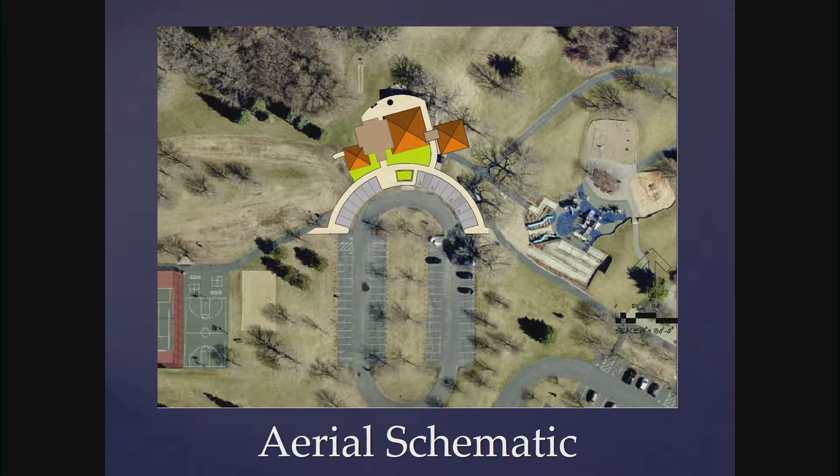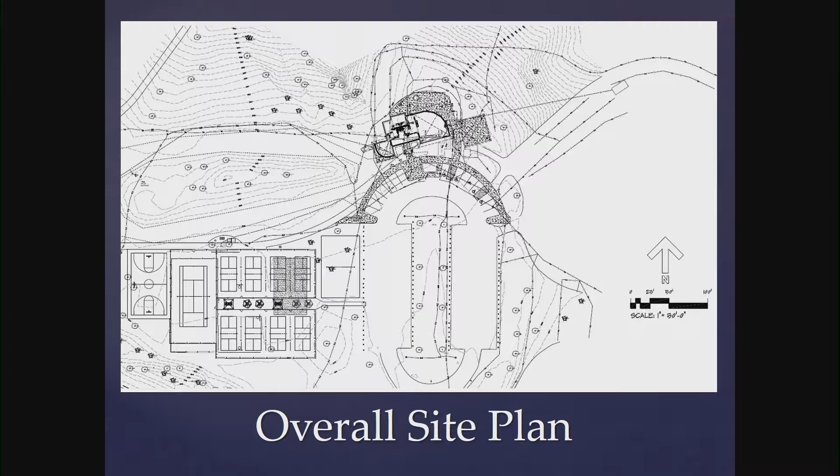This is kind of an overhead view. The aerial was done before the courts were in place, but you'll also see that if we superimpose it on this look, you're going to see where it is in relation to the courts and the sand volleyball court. Pretty tight site too. We've got some really high quality, significant oak trees that we are working around. There's no risk of having to take any of those trees down. We're able to fit that in terms of the layout of the building. It gets a little more linear than it was before, so you'll see the very left side of the building is more of that warming house for skating in the wintertime, support for summer playgrounds.

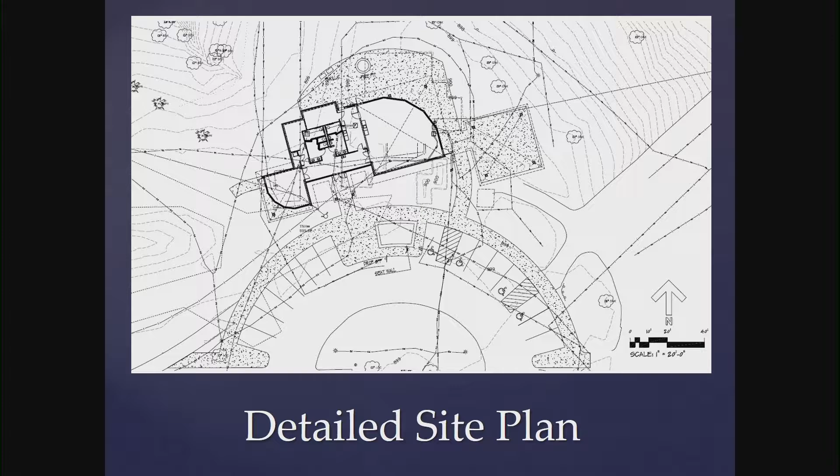The far right side ends up being more of the meeting room and also the warming area for the sledding hill. I do think that what we have designed in terms of a meeting room look and feel to it fits the graduation parties and the 50th wedding anniversaries taking place there now, with even more demand for that and an even better quality environment and experience.

So this shows it a little more in a summertime configuration, where you get an idea of how many tables, chairs, and benches can be put in place.

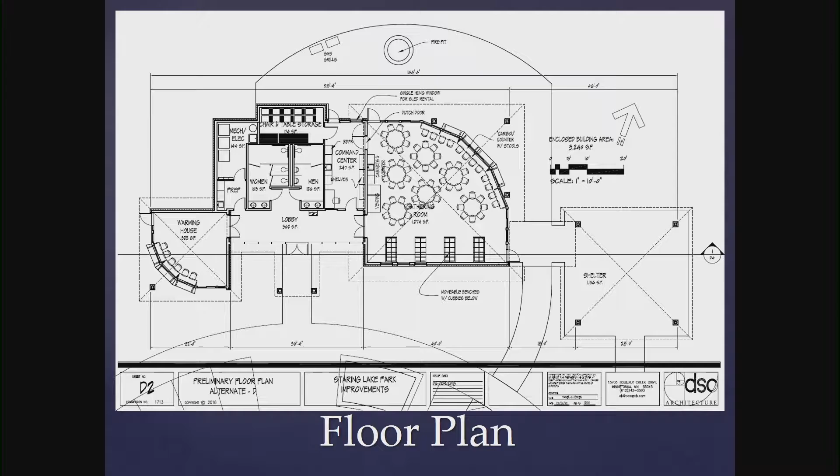The restrooms, similar to Purgatory, we would look to have those open most of the time for public use. You can also think of it as a good event space for a large pickleball tournament, as a good support facility. We've been seeing more 5K runs here and at Purgatory, so this is another place to host events like that.

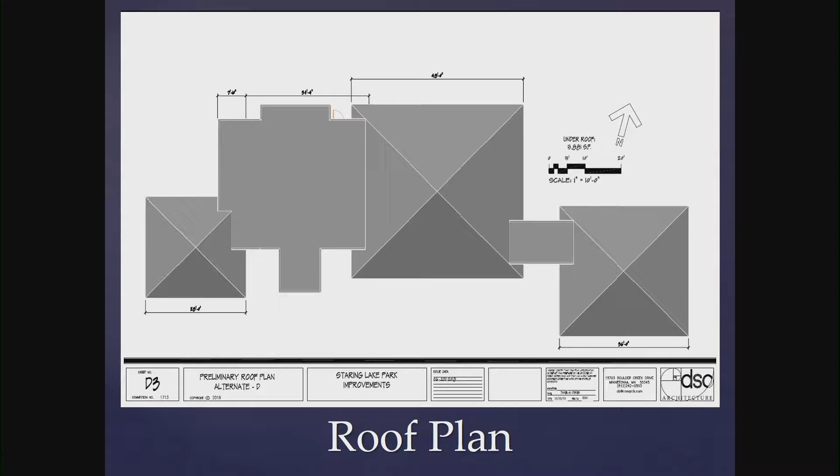This breaks down a little by square footage and what some of the features and amenities are. Again, because it's so open to the public and has such high visibility, with a great view and multiple great views, we're having a lot of windows and glass to look out and see the lake. You'll see a couple of renderings as I move forward showing how we can take advantage of that really nice view. Here's kind of a quick roof line layout from above.

Looking at it from the south, the far right is really a picnic shelter, and as we move forward in bidding, we'd likely have that as an alternate.

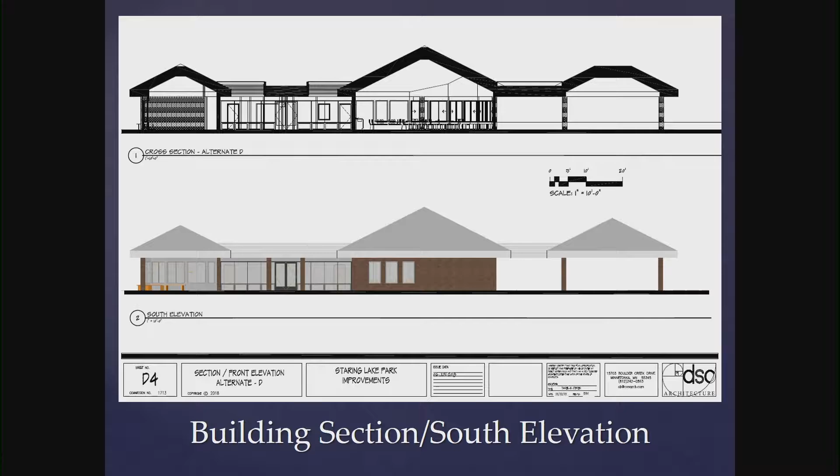The roof line has some overhangs. We're thinking about how people could go there and maybe push a button, like at a bus stop, to get some infrared heating. So if we don't have staff there, you as a parent could still get warmed up a little bit underneath the overhang, with some protection. It makes it a little more of an available facility even if we're not in a position to be staffing it.

Here are a couple other views. We haven't fully fleshed out what the materials will be, but there's some brick, block, and glass intermixed in the design. This is what it would look like from the south looking to the north.

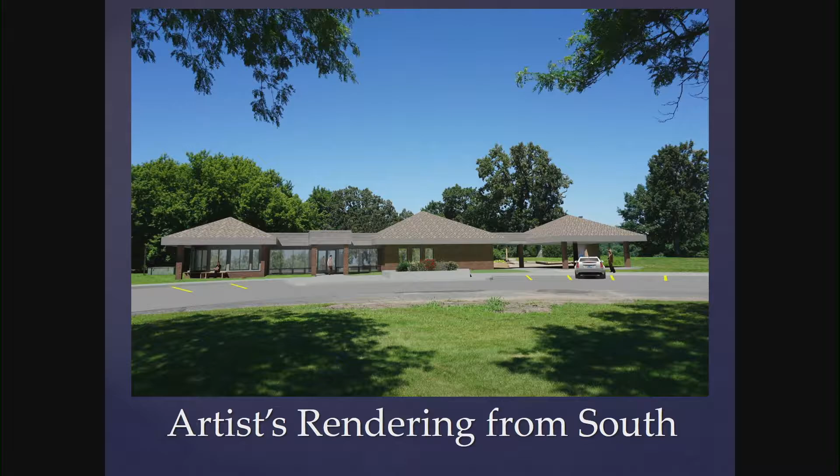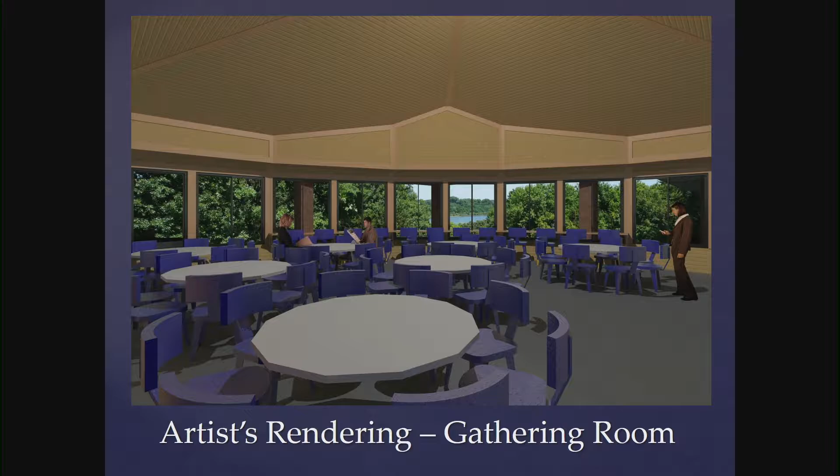If you remember at the aquatic center, we have a counter in a more controlled environment looking out into the pool, for parents who may not want to be in the pool environment. Same thing here — we're looking at a counter towards the window, so in the wintertime you could still see out at the sledding hill. In summertime, maybe there are crock pots on top of it if you're having a family reunion.

So the potential timeline we're looking at — we showed this presentation to the Parks Commission about a week ago and got some feedback from them. Following our presentation here tonight, if you elect to move forward, Mr. O'Brien would start working on the plans and specifications, which would take us to about January and February to bid out the project. We would come back with the results of the bid. If it were to move forward, construction would begin in April and we'd likely occupy by early November.

So with that, any questions?

I've got a question for Council: is the large room for 80 people big enough?

We have different rooms and facilities throughout the system. Even at the community center there are multiple levels of rooms. When we think about the overall site and what can fit there, this pushes it to the side — that's about the largest size we could get on the site without disrupting some of the oak trees or the drainage. I think when we look at why people want to rent a building at Homeward Hills, the barn, this fits into our system pretty well. If you're going to get higher, you're probably thinking about the Cambria room or other larger amenities we have, like the heritage rooms. Though this one has a view that none of the others have.

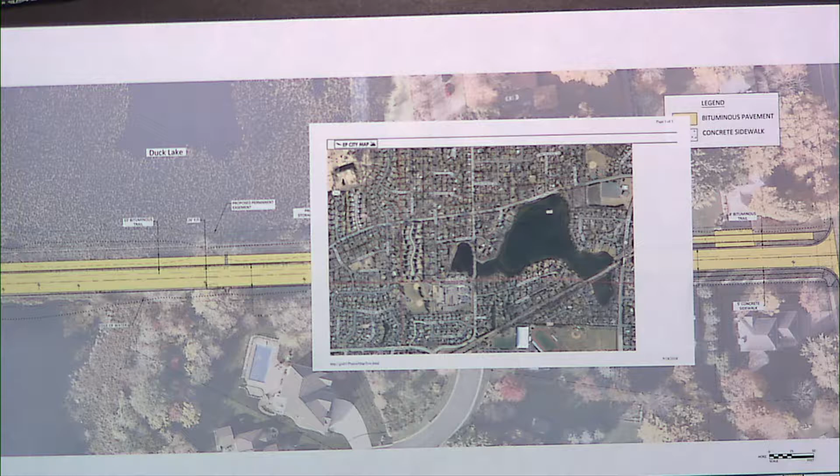As Rick mentioned, tonight we're going to be presenting the layout and asking for a resolution to approve the appraised values of the easements that we need for this layout.

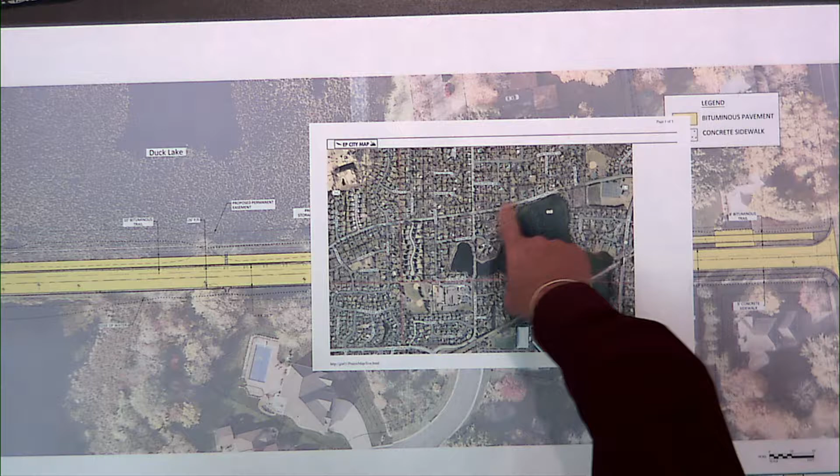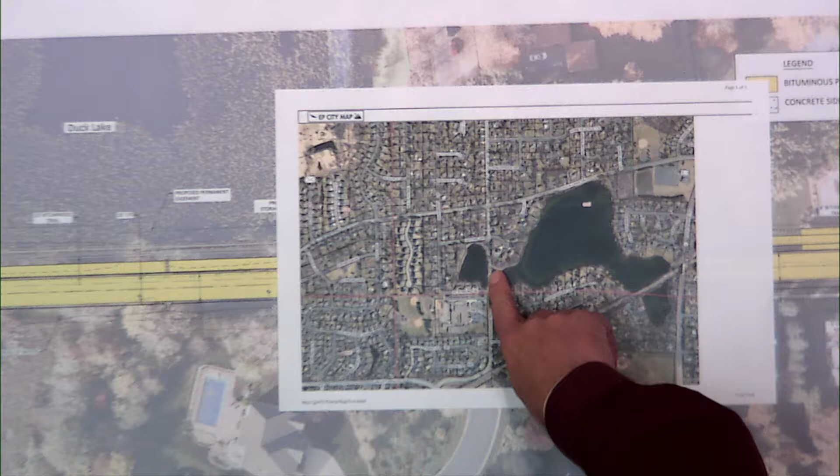So to start, the project limits are: here's Duck Lake Trail, Duck Lake Road, the high school down here, and Duck Lake Road divides the two water bodies. The project goes from Duck Lake Trail down to Mallard Court, this section right here.

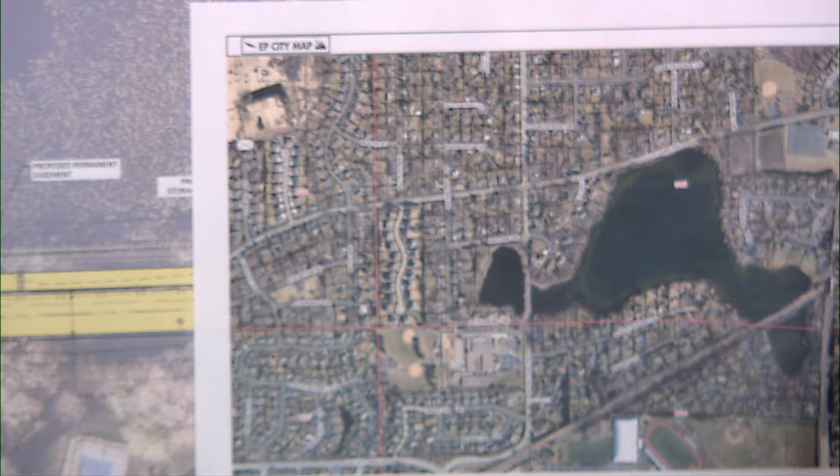I'll start on the layout from the north end. It's a fairly typical city street. The existing road in this northern piece is a little narrower. We're going to continue that same dimension, 26 feet face to face. We're proposing a trail on the west side and a sidewalk on the east side. The sidewalk on the east side would go down to Padons Drive.

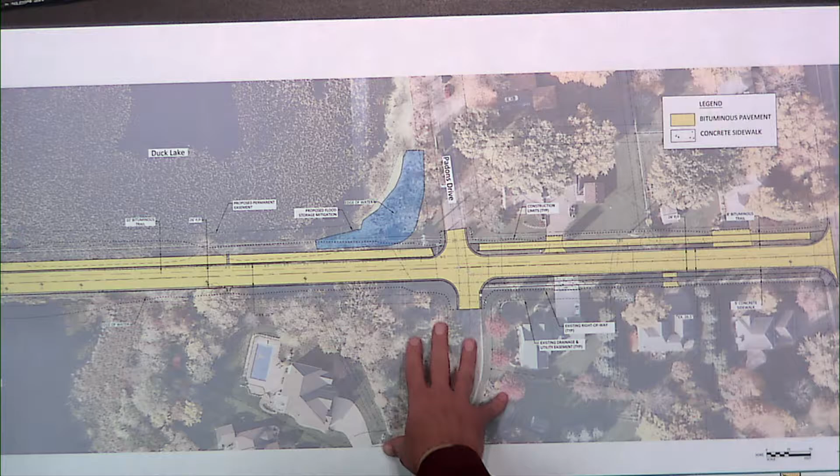And I'll talk about the gap here in a minute. The trail on the west side continues all the way down toward the school, past Padons Drive. Here's the lake area. I don't know how well you can see the construction limits, but I have another graphic later to show you that.

What we've done is we've looked through several alternatives through this section. Obviously, it's a very restricted area with water on both sides. We've looked at trying to continue the sidewalk and trail on both sides. Environmentally, it gets difficult. We had some internal discussions about how to lay the pedestrian and bicycle corridors out through here.

There was consensus that because we wanted some continuity on the west side to access the elementary school. And I failed to bring up the fact that we did have some neighborhood meetings last year in June to present the corridor and ask the neighbors what type of issues or problems they saw in this area. One of the things they mentioned was improving the pedestrian and bike facilities.

As you know, right now this section of road is very narrow. There's no walking without walking on the road. The road is sloughed off, there's really no shoulders. They asked for improvements because they were concerned about the safety of kids, particularly kids and people walking to the school. They were concerned about access to the school, as students get dropped off and picked up, or buses for activities at the school—there's a lot of traffic and backups that occur in and out of the school.

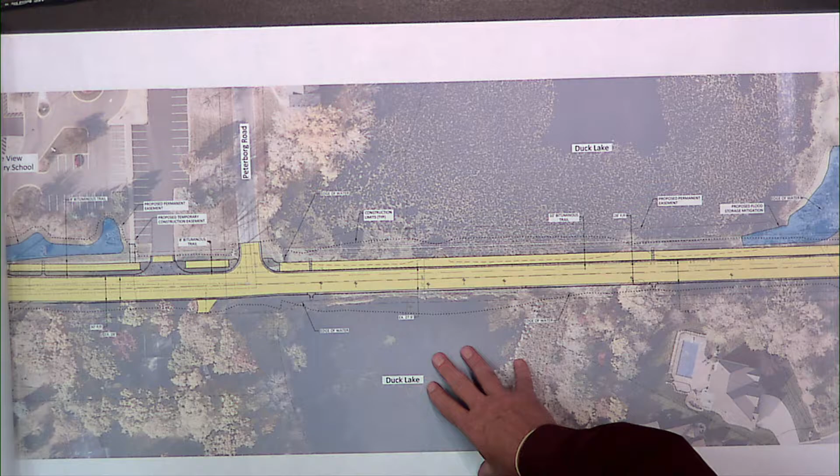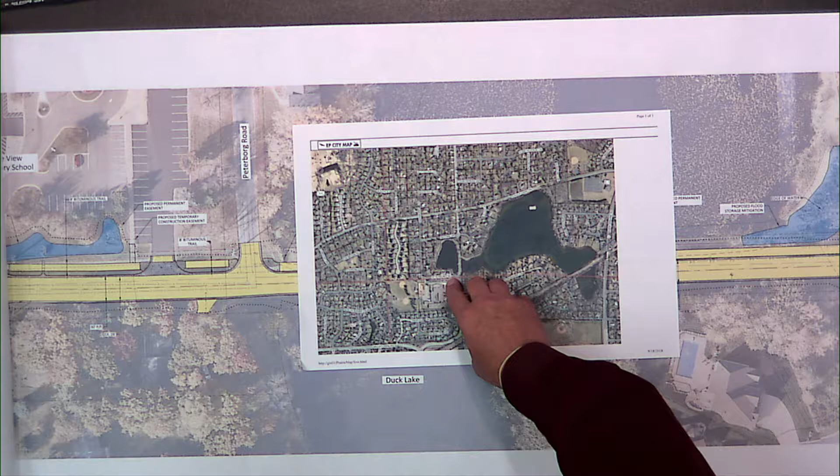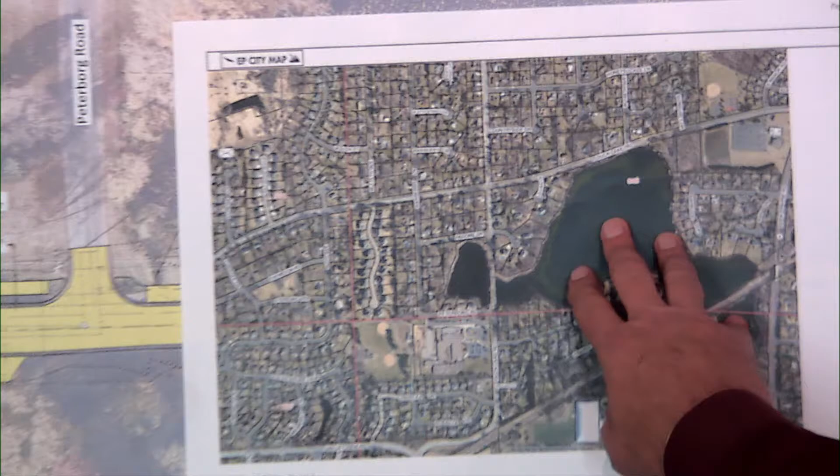There's also a case where the storm sewer, or the culvert that's under the road now, is fairly small. So what happens is the west side fluctuates quite a bit more in a rain event, and has overtopped the road on several occasions. As you can see in the overall map, it's a fairly small area, so it tends to rise quickly. There are some other drainage issues in the area I'll mention in a minute as well. The big side of the lake rises very little in comparison to the west side, so that west side will overtop the road. With this project, we're proposing a larger culvert that will equalize the two water bodies, using that storage on the big side of the lake to reduce the amount of flooding that occurs on the west side.

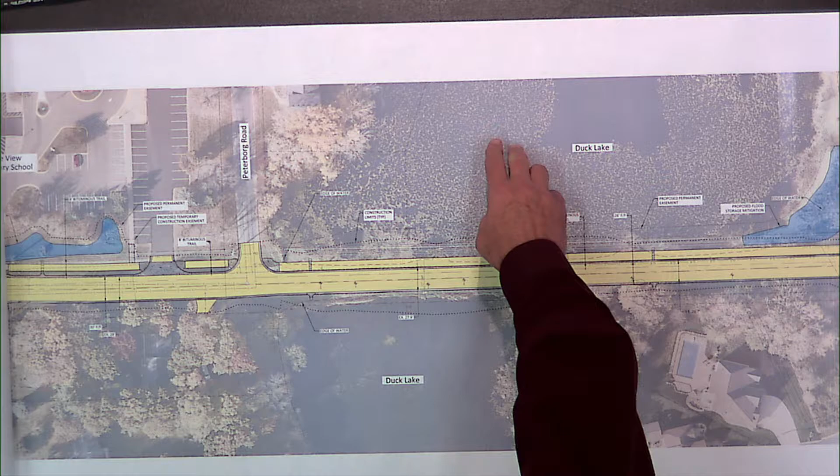After the neighborhood meeting in 2017, we developed this layout through internal discussions about where to put the trail, where to put the sidewalk, whether there should be one on both sides, what the width of the road should be, what the width of the trail should be. We looked at a boardwalk and many alternatives, probably 6 or 7 different options, and arrived at this one, which met the needs we heard at the first neighborhood meeting.

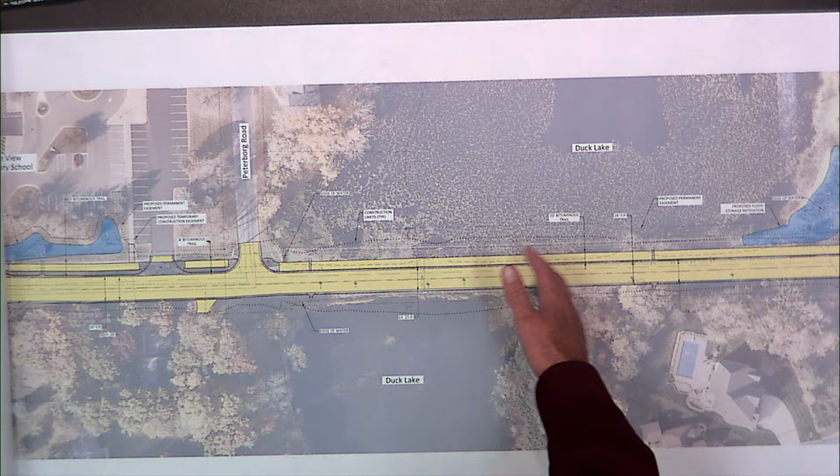So in April of this year, we brought this layout to the residents looking for their feedback. It was very similar to this, with a few small minor tweaks. We had very good support from the neighborhood—they liked the plan, they liked the trail access, and they liked the pedestrian and bike access to the school.

Moving on down the road here with the layout: the road widens a little bit once we get down by the school, to 30 feet wide, once we get past the restricted area where the lake is. We've got a crosswalk there—there's currently a crosswalk right here over to the school, and we'll be adding a crosswalk again. The gap in the sidewalk is between South Shore Lane and Paddens Drive, and one reason that sidewalk wasn't included is because we're trying to minimize the width of the impact on the two lake areas. We did pick up a sidewalk again from South Shore Lane down to the south. So basically there's a trail on one side, the west side, and a sidewalk on the east side, with the exception of through the lake area.

I was out there—there's a crosswalk on the north side of South Shore Lane. What does it go to? Is there a sidewalk on that north side right now? On the west side there's partially a sidewalk, partially bituminous. Make the turn and then, right there—what's there now is just a marked crosswalk, but there's no trail facility. So the crosswalk goes to the yard, but it goes to the neighborhood so that they can access the school. Councilmember Case, you're correct, there are no ramps or sidewalks on the east side—it's simply a crosswalk that takes kids basically into the road, South Shore Lane, and into the grass.

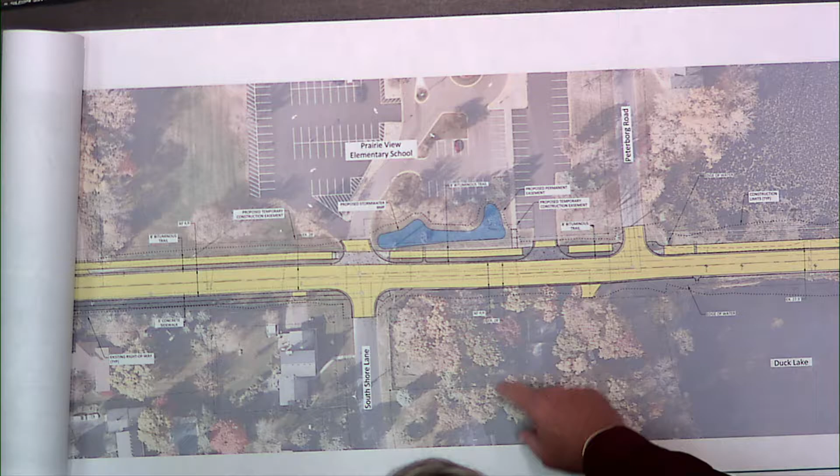What is that little yellow thing that looks like it's on an island? No, that's a crossing towards the lake. It looks like there's just a little piece of sidewalk there. That's a driveway—oh, okay, home here, and it's a driveway access, I believe.

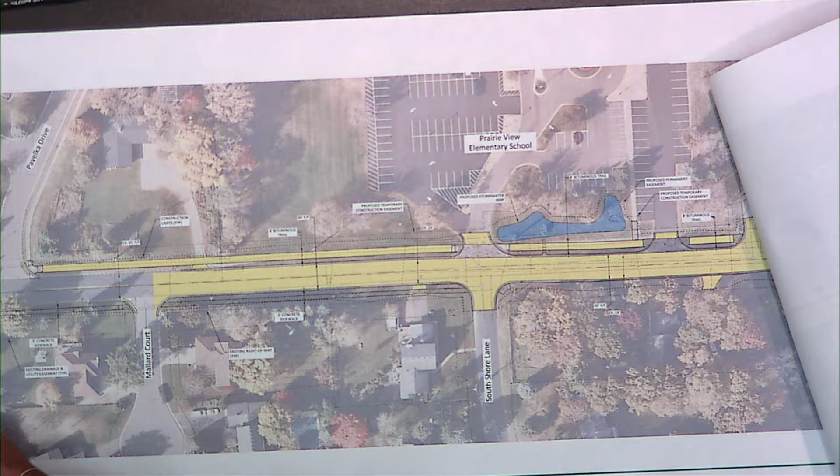So then the road continues down just slightly past South Shore Lane and ends at Mallard Court with the road reconstruction. Again, the trail extends, and the sidewalk extends further south down to the recently completed railroad crossing, the pedestrian crossing over to the high school.

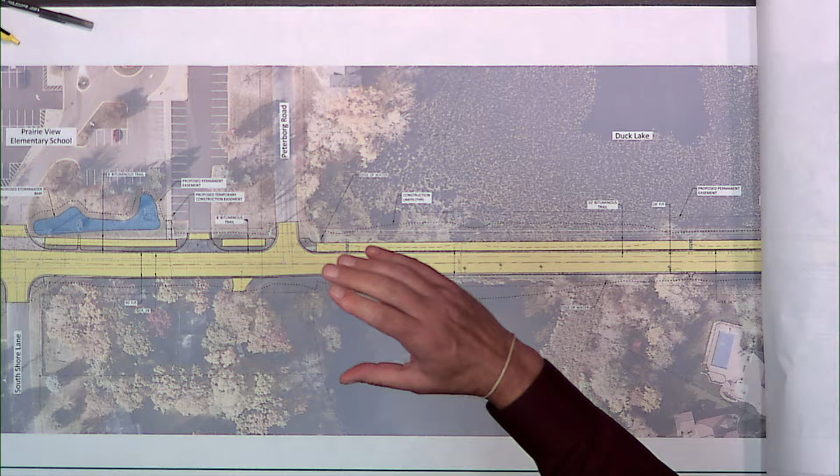Let's talk a little bit about the staging and schedule. Going back to the crossing, this is obviously our most challenging area with the lake and water and poor soils. The biggest issue is right through here, constructability-wise, so what we're proposing is to surcharge this area—basically putting soil on top of the underlying peat, which is about 3-4 feet thick but about 6 to 8 feet deep. Instead of digging it out, we're looking at surcharging it, adding material about 2 feet at a time over a period of about 3 months.

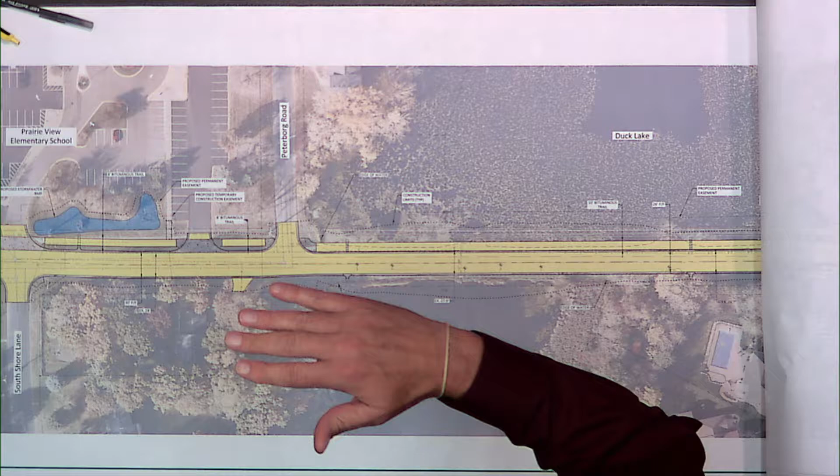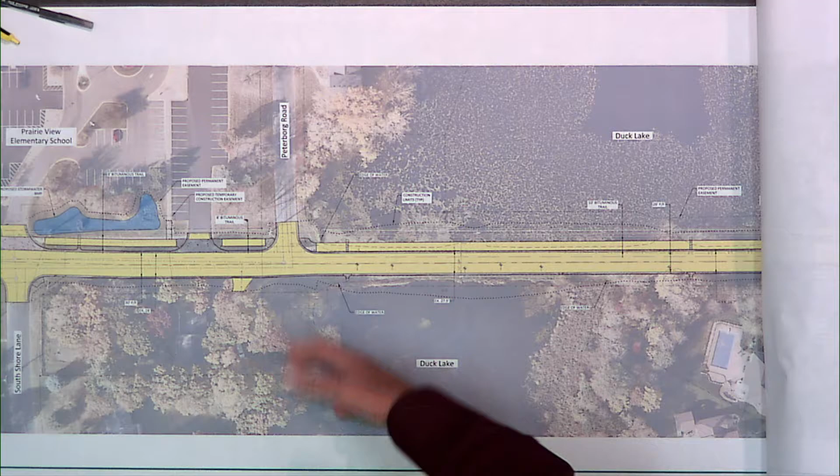We're proposing to do that over the summer next year, after school's out, and have it completed before school starts. There are 4 stages of that surcharge. The final surcharge actually goes over the entire road from about here to here. We'll put a temporary surface on there and some ramps, and then over the winter that surcharge for the whole section needs to be there for a minimum of 6 months, but it'll actually be closer to 9 months because we'll leave it in place for the whole school year, between fall of '19 to spring '20. Then in 2020 we'll remove the surcharge and build the bulk of the project, the rest of the project.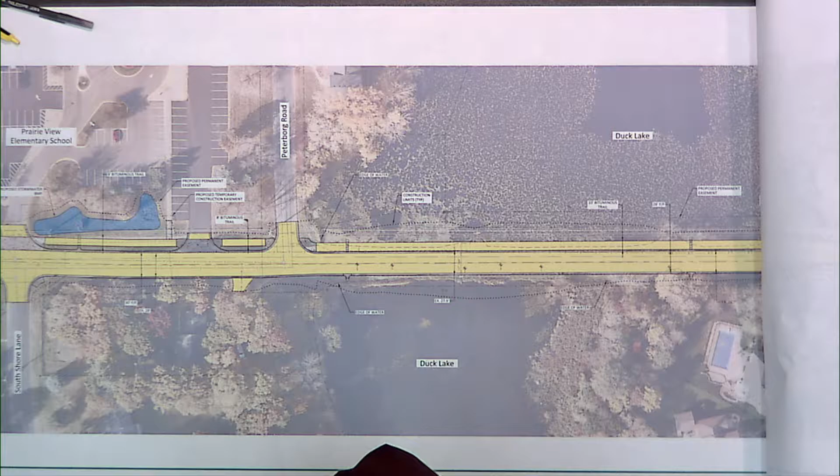Does that require mitigating wetland? Yes, it does—even though we remove it, we don't reconstitute the wetland. We're covering it with a trail. There is some wetland mitigation; I believe it was less than an acre, about 0.8 acres we're impacting.

Do we still have land out west that we're party to, some land that we use to mitigate within the watershed? Yes, we still do have that land, but the wetland mitigation for this project is being used out of the state's bank.

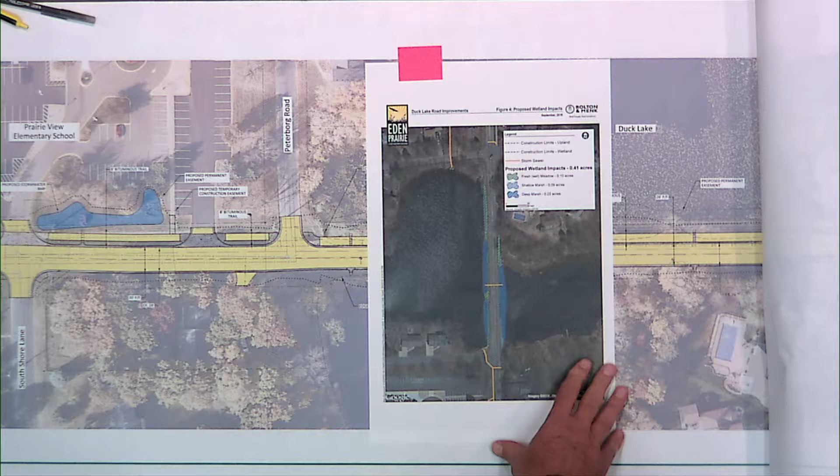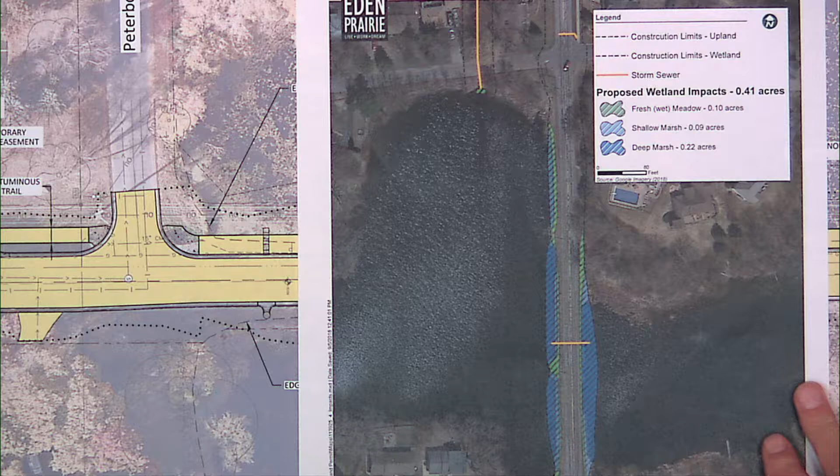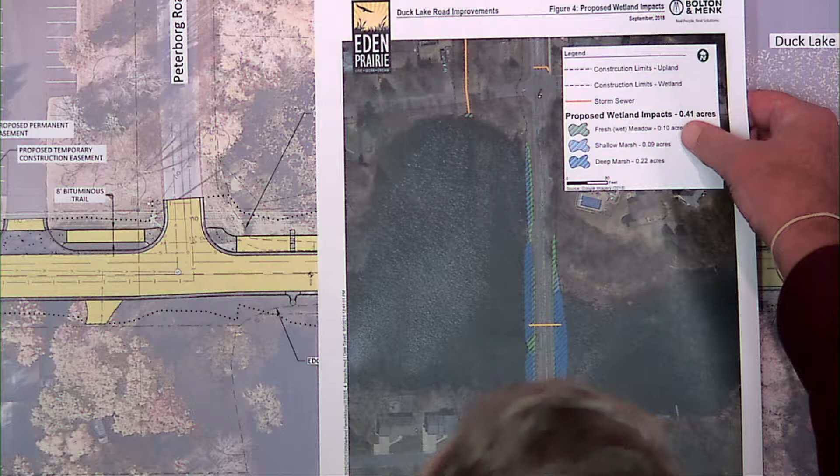So here is a graphic that shows the wetland impacts. The different colors are the different types of wetlands impacted: deep marsh, shallow marsh, and fresh meadow. So a total of 0.4 acres of wetland impacts, but we're mitigating 0.8 — that's 2 to 1.

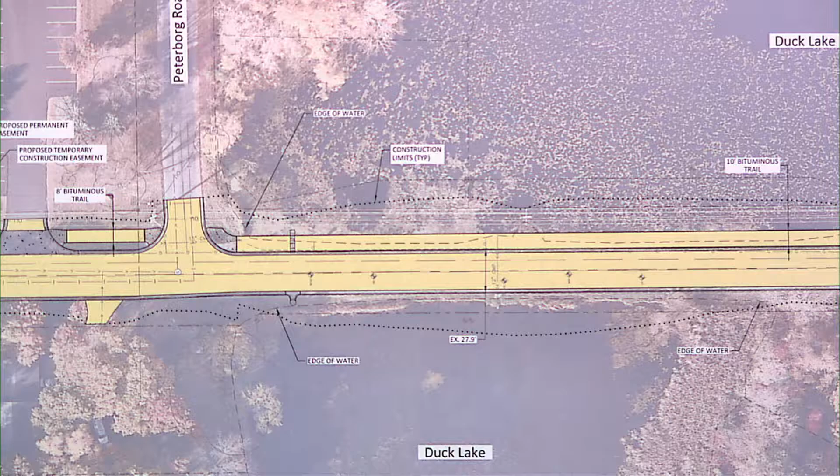And then there's another portion of the project that's not really related to Duck Lake, other than it's a neighborhood issue identified during the neighborhood meetings that we're going to try to solve with this project. We're going to bid it with Duck Lake Road, but it'll be a separate improvement. The backyards of these homes north of Padons Drive are very low relative to the lake level. Many times the water will sit there for days because there's so little elevation difference between the backyard and the water level, especially when it's high.

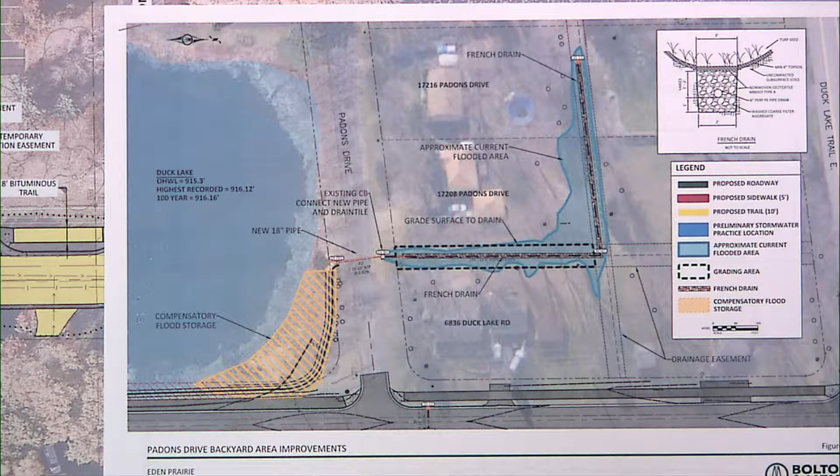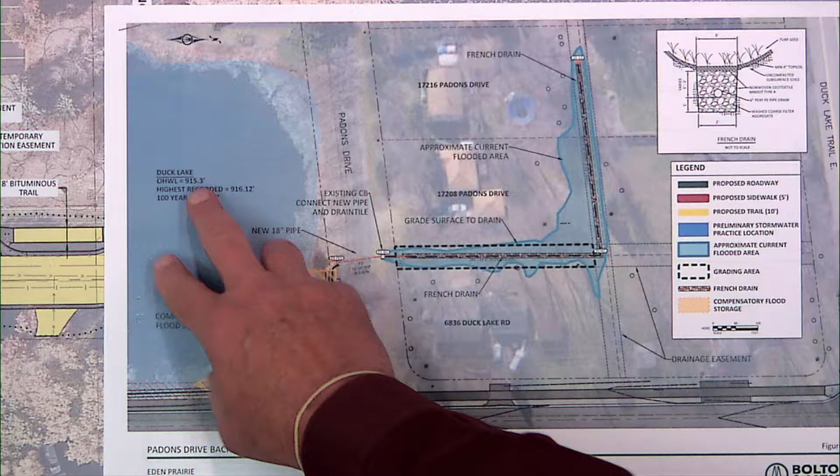So what we're doing is proposing a drain tile system. It's basically going to be laid flat because there's no grade you can even get — you can't create any grade. The culvert under here will be replaced. Because of the balancing of water levels between those two lake lobes, the water here won't come up so much during rain events. This is a bit of compensatory flood storage we're losing with the road widening. This is a project that was kind of asked for by the neighborhood, and I think they've appreciated that effort.

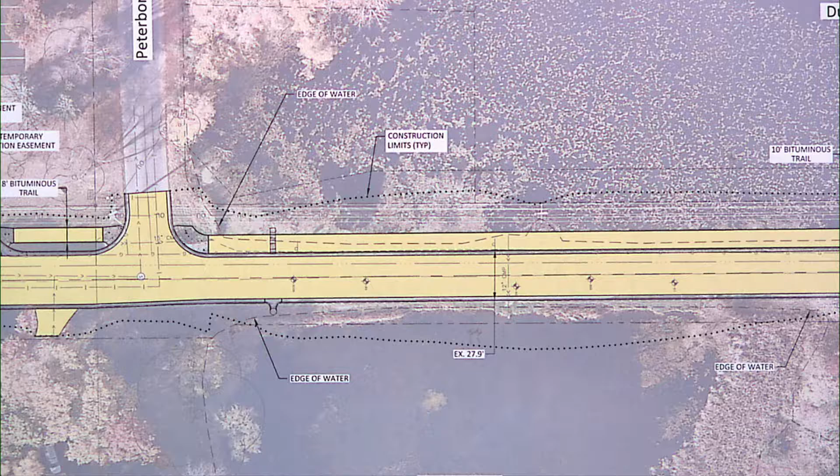And we own that right of way already, correct? Between the two yards? We have a drainage and utility easement through there. We don't have— that's correct. Thank you, I knew that— easement, thank you. Yep, but we have an easement. And we'll work with the property owners to get some rights of entry to do the work. It should be fairly shallow, fairly easy work to do.

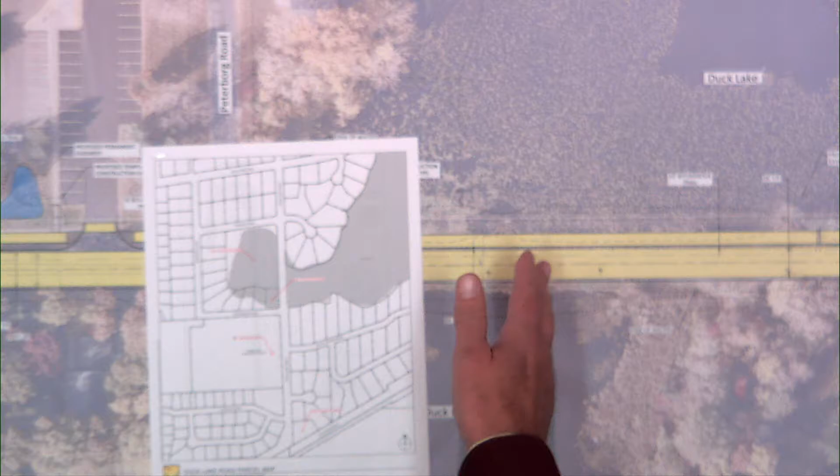Now before I get into the second part, I'll talk a little about project costs. The construction costs for this project as proposed is a little less than $2 million. When we add the engineering and right-of-way costs, particularly a lot of the testing — we had to do quite a bit of soil borings and analysis — it's going to be probably closer to $2.7 million, which will be almost all state aid, with a little bit of stormwater utility money.

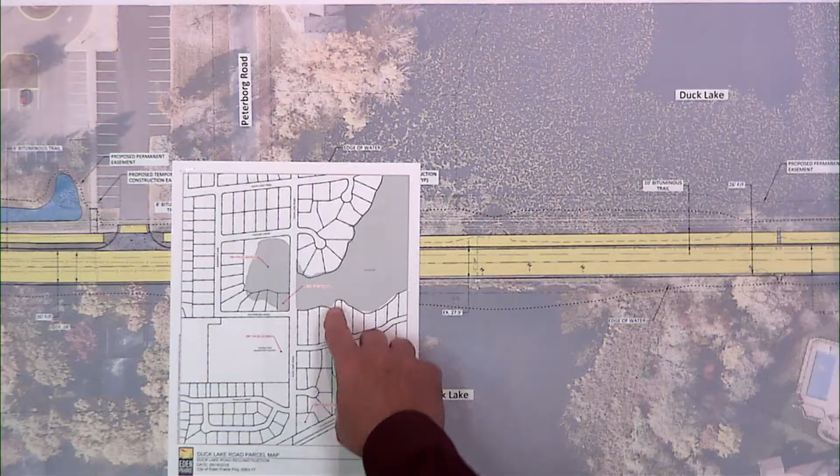So the other part of the action tonight is requesting a resolution to approve the appraised values for the easements we need. There's currently 4 properties we've identified that we'll need right-of-way for, or easements. This property here is actually about 80-90% water — this property owner owns that whole big rectangle. And this property here is also owned privately, but it's about 99% water. So we're purchasing permanent easements from them.

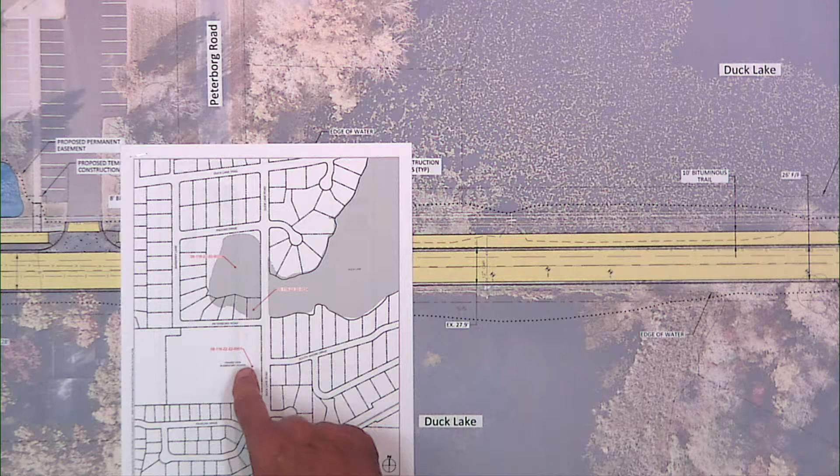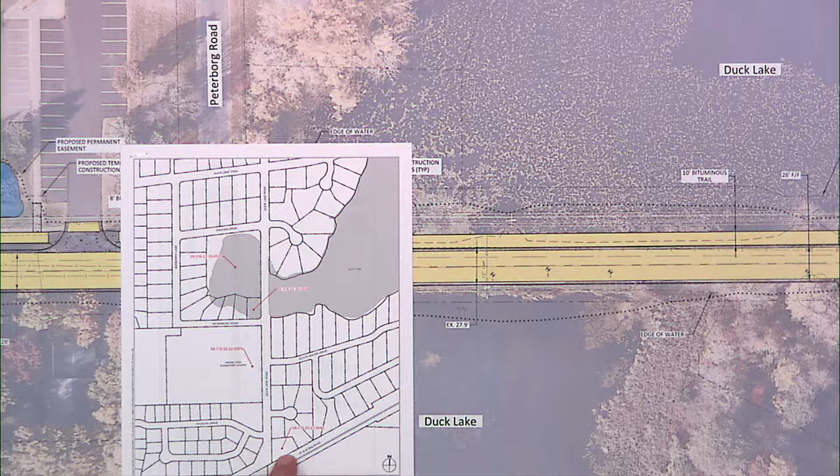This is the school — we need an easement from the school, as we're doing a stormwater treatment facility, an infiltration basin there. We've talked to the school; it's going to be used as kind of an educational component for kids, looking at vegetation and how we handle water and so forth. And then the last property we've identified at this point is the most southerly property, right before you get to the railroad crossing.

I did hand out a packet of easement drawings that shows these easements. I'll just go through them rather quickly. This is the property that's by the lake — this is Padden Drive right here, Duck Lake, and this is the area that's got that large property with water on most of it.

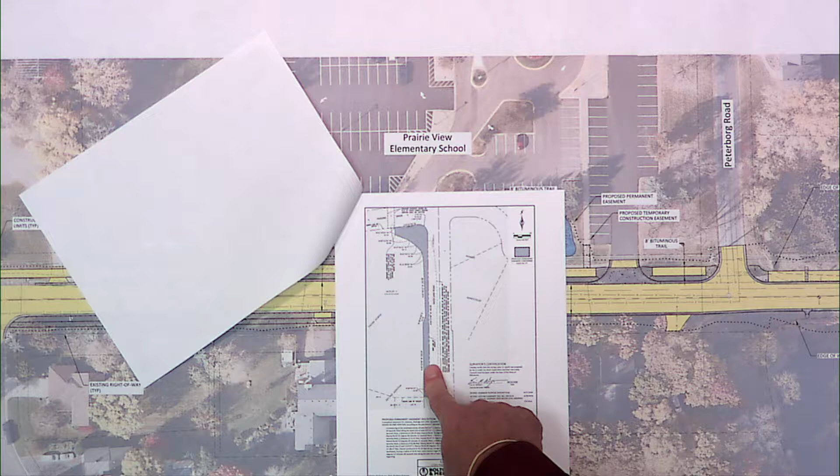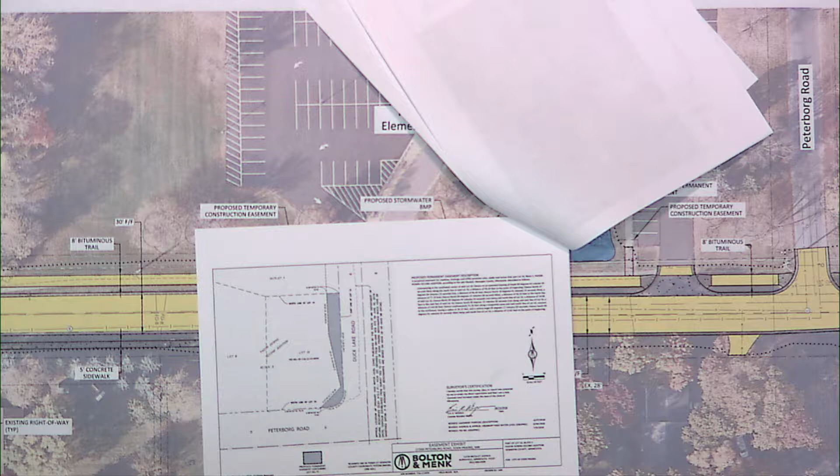The next one is the property to the south, at the corner of Peterborg and Duck Lake. Again, we're obtaining the easements that we're encroaching upon with surcharge and grading. We're not purchasing the entire parcel.

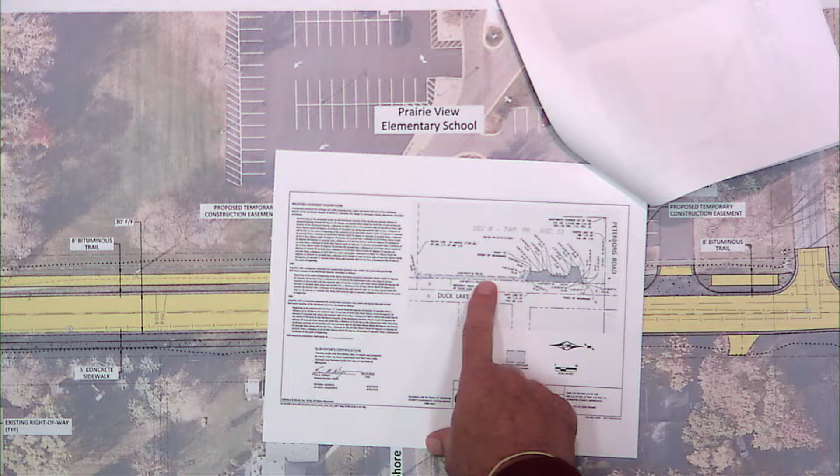Here are the easements needed from the school. We have a permanent easement for the pond and water treatment facility, and then there are some temporary easements along the boundary of the property to grade in adjacent to the trail.

And then lastly, this is the property at the far south end, where we're extending the sidewalk down to that crossing of the pedestrian crossing at the railroad and into the high school area. This one involves an easement for the driveway.

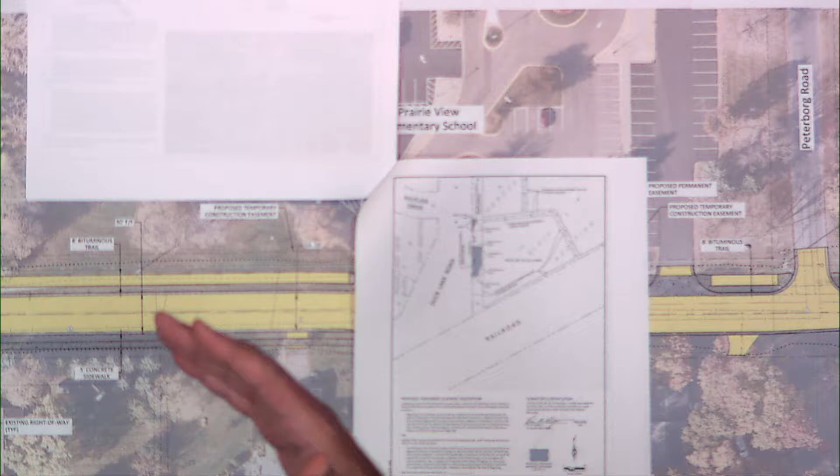We need to replace their driveway as we build the sidewalk, because we're keeping the grade the same, just moving it back. It's about a 10% driveway now, and we're keeping it at 10%, just moving it back. There's also a little bit of grading on the corner here to deal with the landscaping, the bermed area.

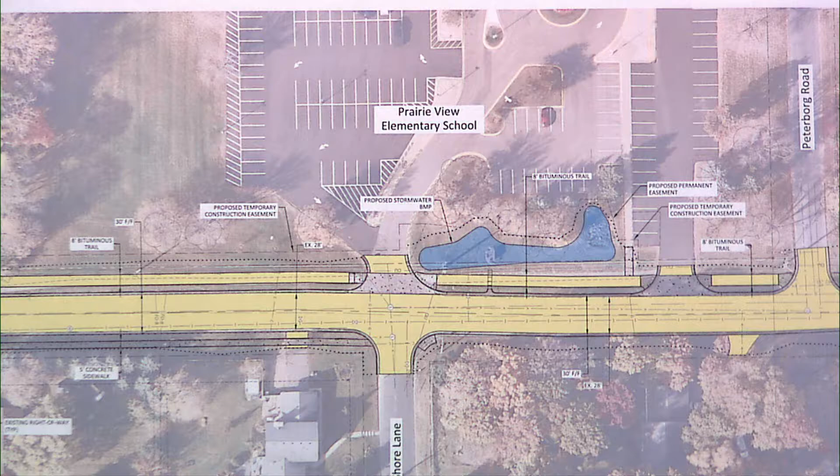The next steps: upon approval of the layout tonight and the resolution approving the appraised values, we'll begin easement acquisition. The final design is underway at this point, and we'll be going through that process. The final design just started a month or two ago, so we'll be going through more of that.

We'll be permitting, which will be a challenge through here. We've had several meetings with the permitting agencies and we're continuing those efforts. We plan to bid this in early spring of '19, with construction in the summer of '19 and the summer of 2020. So with that, if you have any questions.

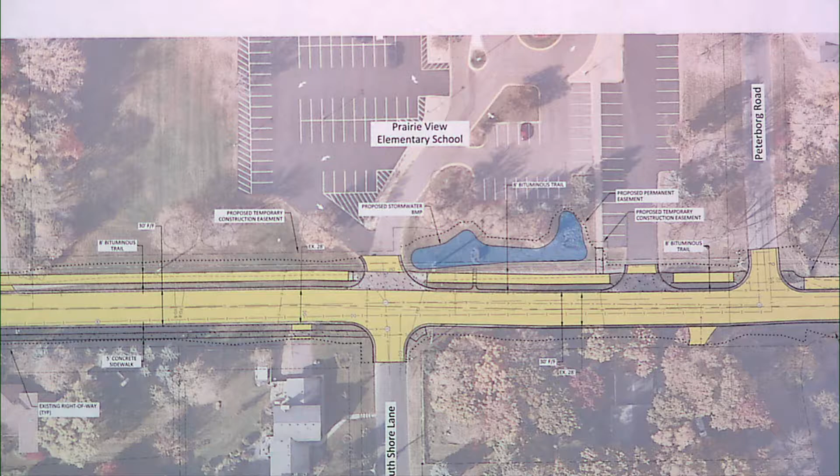Go ahead, I have a number of questions, Mr. Rue. So if you go back to your big drawing, the scroll there, and look all the way at the north end of the project, you have the intersection of Duck Lake Trail and Duck Lake Road.

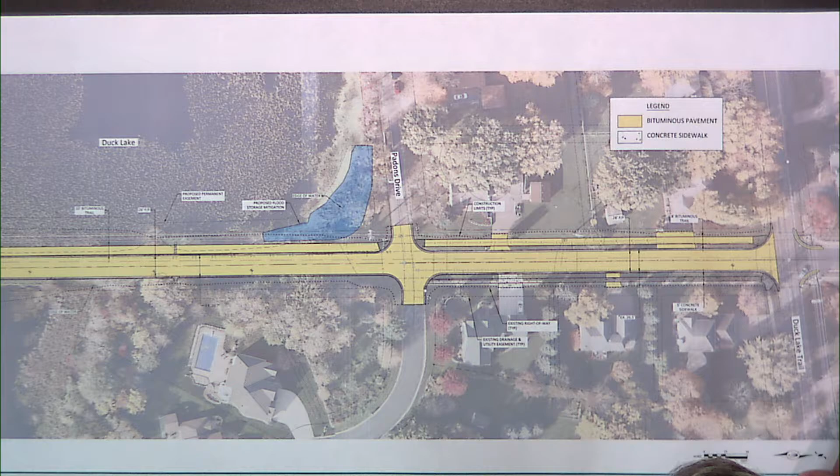If you look at the property on the southwest corner of that intersection — yeah, let's see, is that north? Yeah, right there, that property. If you look at it, where the garage is in relationship to Duck Lake Road, there's not a very large distance between the garage and Duck Lake Road.

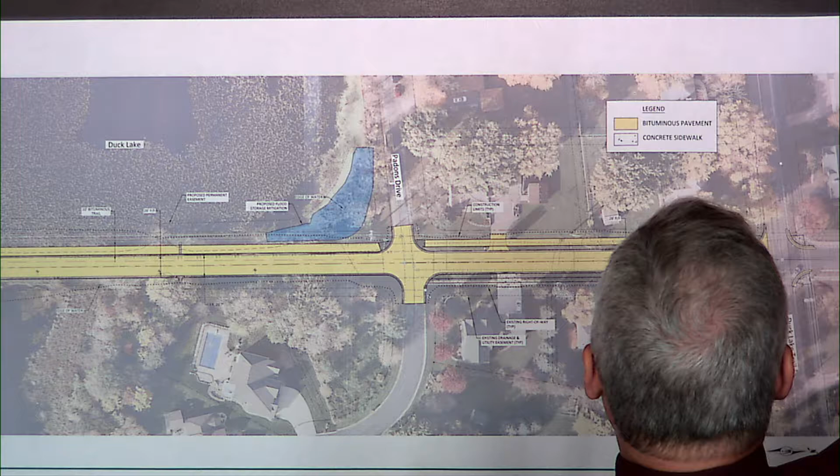So the resident there has a real concern that if we widen Duck Lake Road and put a trail across that driveway, he's really left with nowhere to park vehicles. Currently he parks on that driveway, but he asked, if the trail comes across there, will he still be allowed to park his vehicles there? He said when he has company over for Thanksgiving and holidays, it's really difficult to park on Duck Lake Trail because that's a narrow, fairly busy road. So he's really just left with his driveway, and he's very concerned that if we run a trail across that driveway, he's left with nothing there in terms of parking.

Yeah, it looks like that house might be quite a bit closer than the normal setback, which probably means it was built long before that road was there. So we can look at making some adjustments and figuring out that distance.

And if you look at that section, that happens to be where there's already an existing city sidewalk on the other side of the street. So his question was, do we really need a trail on that side of the road right there? Could we just leave that city sidewalk on the east side of Duck Lake Road in place, and not put the trail on the west side?

Well, we would like to see some continuity. There are sidewalks on both sides of Duck Lake Road going all the way up to County Road 62, so this continues that, with the before-mentioned gap here. So we'll have at least some type of facilities on both sides. The benefit of having a bike trail is that it's multi-use — sidewalks are typically just for pedestrians, whereas the trail is used for peds and bikes.

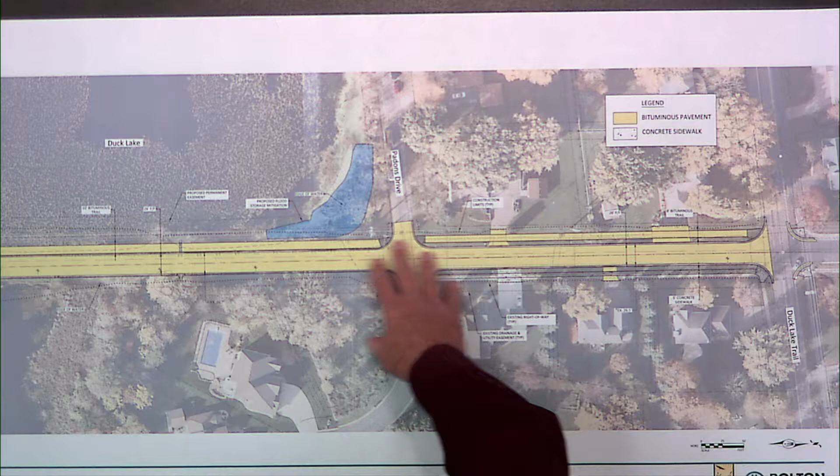We did make a conscious decision through some vetting internally, as well as with the consultant, that came up with this being the best solution: having the trail on the west side. Now that can change, but that was our recommendation.

I would just suggest that we look at that corner a little bit more, look at his property, and work with them to find a solution that's agreeable to him. Because right now I can certainly see his concern. He's really going to be left with no parking area there at all. If he parks in his driveway, what is currently his driveway, he'll be covering up that trail.

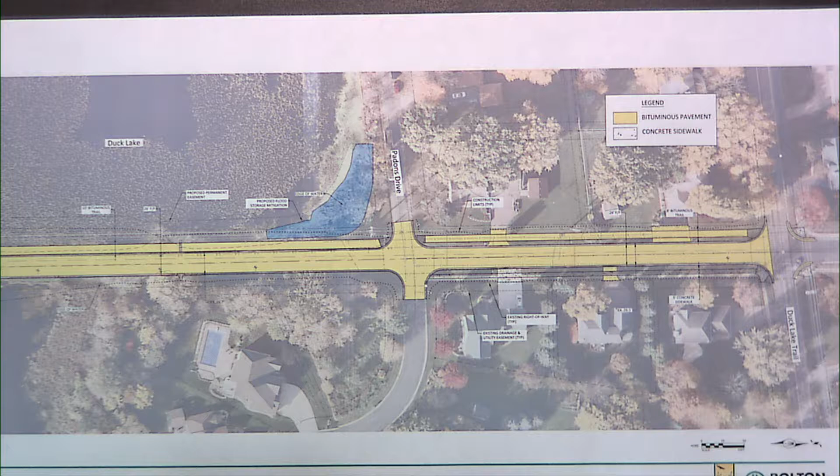Well, we can look at that. Obviously you'd like to have at least 19 feet, which is the depth of a parking stall, between the garage and the trail. So if it's less than that, we can certainly look at making some adjustments, maybe slide the trail over just in that section.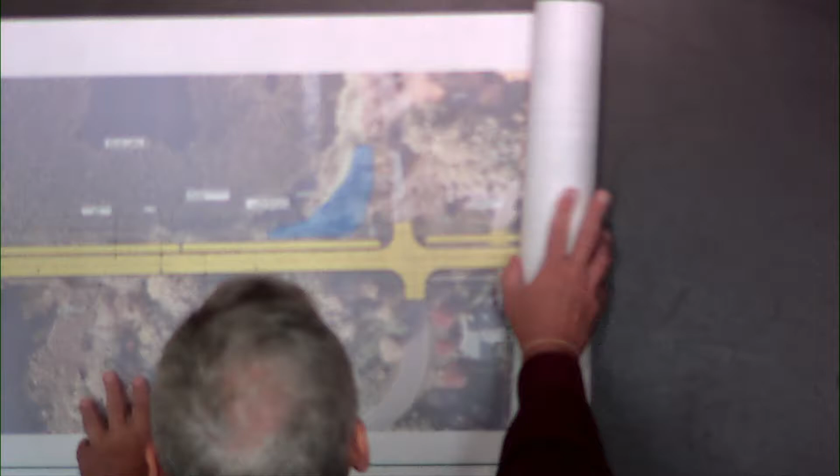The other thing I wanted to comment on was just south of Padons Drive, where you've got the small body of water on the west side and the larger body, Duck Lake, on the east side. In that section, if you're trying to build a trail through there, there's a lot more water to cover on the west side than on the east side. So if you put the trail on the east side, you have a lot less water to cross. I was wondering, what is the feasibility of locating that trail on the east side there?

Anything's possible. I think one of the reasons we chose this side is it's shallower on this side, the water depth is shallower, and there's less soil correction. I mean, there's peat on both sides, but the depth of the water on this side is quite a bit more than that side. So you can see the construction limits go out quite a bit further on this side than they do on that side by the time we get to the toe of the slope underwater.

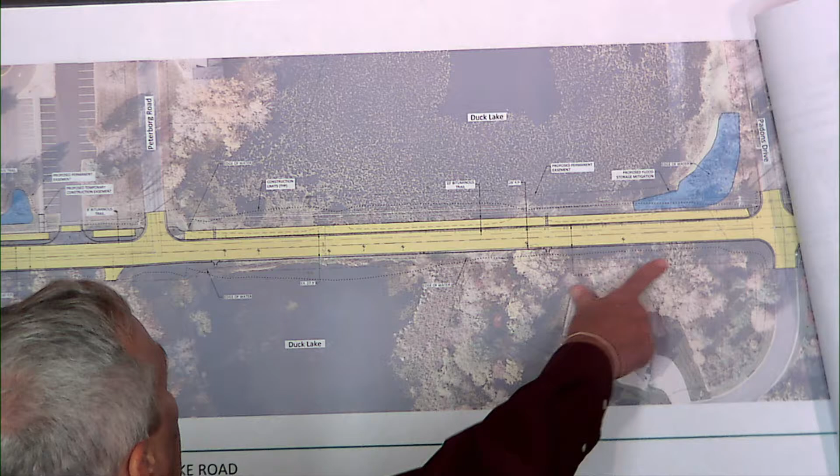It's just that there's a lot less water, I think, to cross if you do it on the east side versus the west side. Yeah, and we did look at that a little bit. The other issue we had was this property here. We don't know what kind of easements we'd need, but we probably would need more easements along here. I know we'd need more easements here because that's one of the areas we looked at when we were considering a trail on both sides. This property goes up pretty rapidly off the road, and we'd be cutting back into it quite a bit through some of these trees. So that was another consideration.

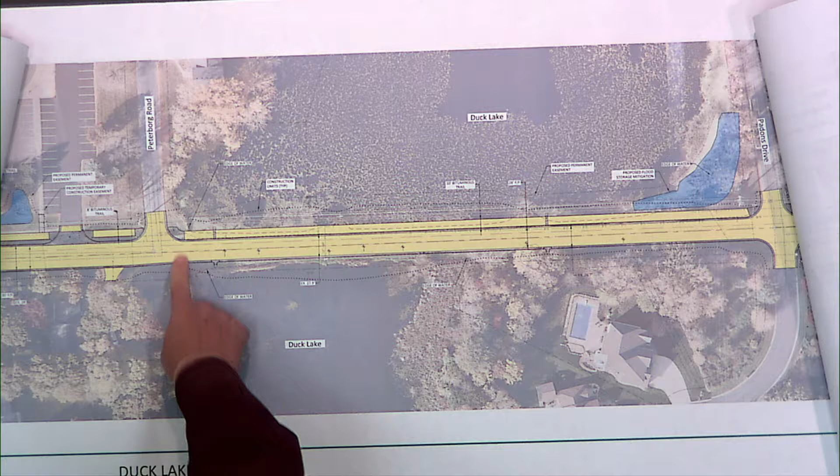But could you keep it on the east side just before it gets to Peterborg Road? Right there, end it right there, and maybe even cross over. So keep it on the east all the way down to just north of Peterborg, cross Duck Lake Road there, just north of Peterborg.

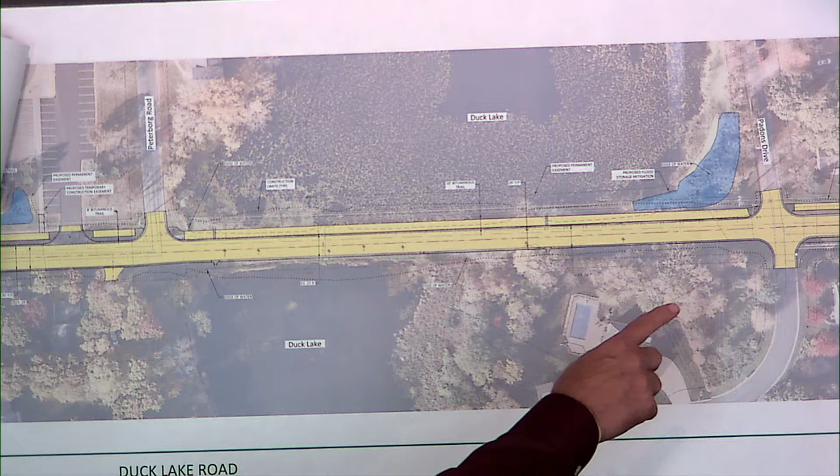So what were you considering up on that end then? To switch everything over? Currently you have a city sidewalk on the east side, south of Duck Lake Trail to the east of Duck Lake Road. If we're concerned that it's not pedestrian and bike friendly, maybe make that into a trail, and continue it straight south just north of Peterborg. Then if you need to cut across Duck Lake Road, have a crossing there, and extend it to the south on the west side.

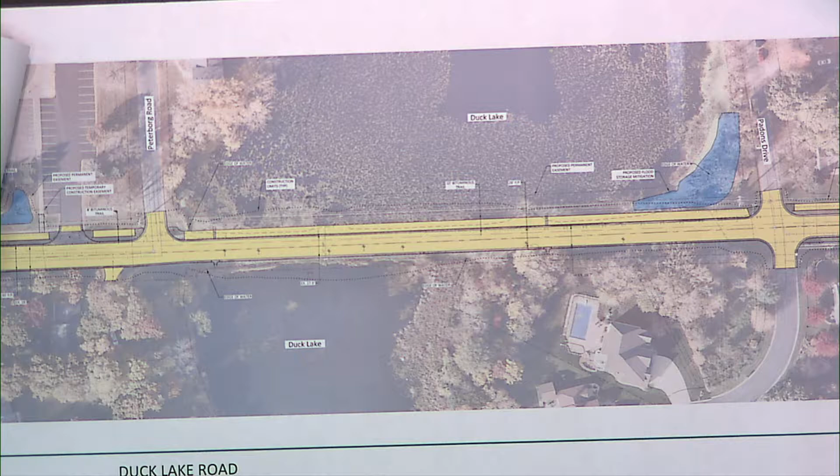This feels a little bit like whack-a-mole, in that we're squeezing to try to help, which I appreciate, neighbors on one part, and we're going to impact neighbors on another part, because then there's neighbors on the south side that do not want it on the east side. They'd rather have it on the west side.

I think what I'd like to see is to step back and think about the big picture. We've got a school there on the west side. So what I'd almost prefer, the best of all worlds, would be for the good of all, the good of the whole city, realizing there are negative impacts on individual people and homes sometimes, but for the good of all, the best is what we've done around the city: a 6 to 8 foot bike trail on one side and a 5 foot concrete path on the other.

We try to run that on busy thoroughfares across the whole city. I understand completely that in this isthmus that's counterproductive for multiple reasons: environment, cost. But what I'd like to see is that because the school's on the west side, we concentrate on the west side. I know that negatively impacts the neighbors up on Duck Lake Trail and Duck Lake Road on that corner, so I'd like to try to mitigate that the best we can, squeeze that toward the road if we can. But I think that bike trail and that large walking, biking, pedestrian trail, because it's on the school side, should go down the west side.

I do have questions on the sidewalk on the east side when you go down toward the railroad track, because then you've got sidewalk, no sidewalk, sidewalk, no sidewalk, and crosswalks in some places. I think I'd almost rather push people, push kids, to the west side as a safer route to get them to school. And down at the railroad crossing, where we built an incredibly fancy crossing which I hope high school kids will take the time to use and not go around it or meander—nonetheless, the point is we've led them to that point, and we've got a beautiful crosswalk coming over from the west side. Now we're talking about keeping some kids on the east side but not over here. I'm almost taking the opposite issue than you—if we're going to have to pick one, let's push everyone to the west for the safety of kids, is what I would say.

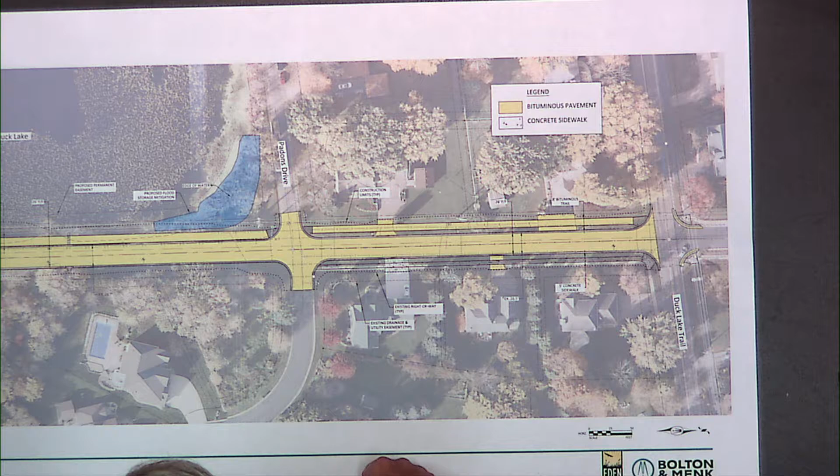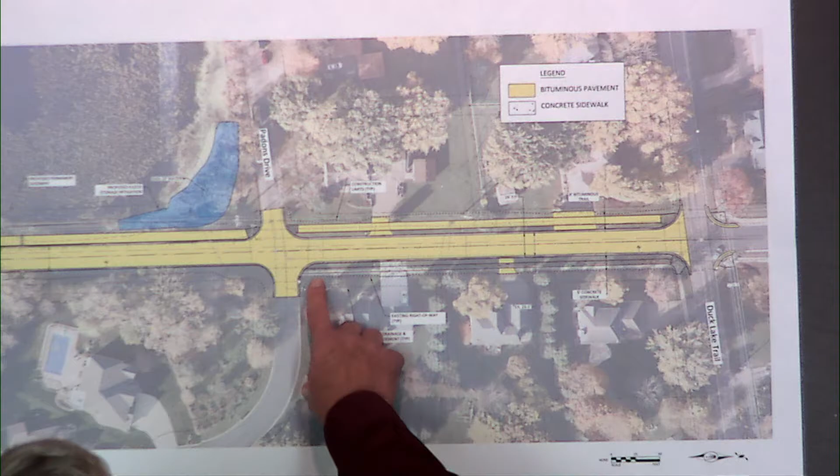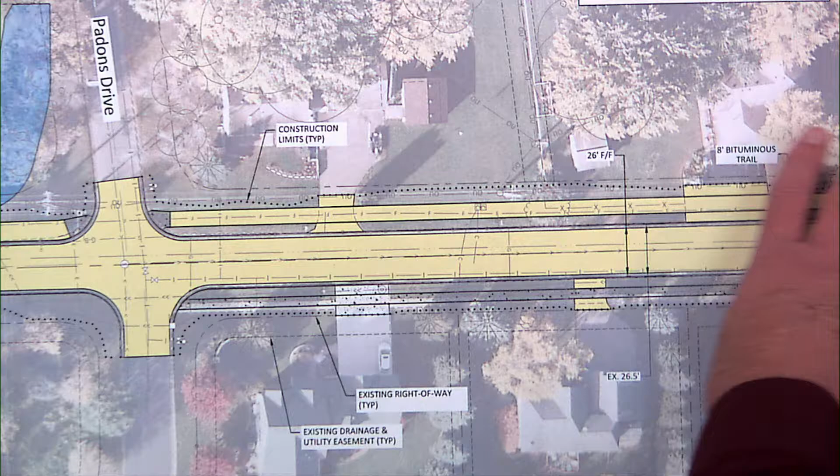Well, we can look at the situation a little more closely. This is the layout stage. As we get into design, we can look and try to get that dimension nailed down, get on the property and find out exactly where that garage door is and what that distance is. Presumably you want at least 19 feet. If we need to slide this in a little closer to the road for a short period, that might be a solution. I did want to point out—you can see the dotted line there, the series of dots is the construction limits, and you can see that we're hugging right on the property line on this side. So if we do widen and put a trail on this side, we're going to impact these three properties with easements. Right now, all the improvements in this area are within the existing right-of-way. And as I mentioned, the only ones we're looking at easements for are the four identified earlier: the two by the lake, the school, and the south property.

Go down and look at the one on the south that's right next to the railroad crossing walkway, and talk to me again about the sidewalk—why it makes sense to staff to have it on the east side right there when we really want to move people to the west side. I think the rationale was trying to get a facility on both sides of the road, like we typically do on some of our more collector roads, knowing we had a gap in the middle, but presumably maybe someday that gap could be filled with a bridge or boardwalk to continue that.

The other issue we've talked about with park staff is maintenance. If we have a trail, we're able to maintain that lot easier than a sidewalk, particularly because some sidewalks aren't always maintained by the city; they're maintained by the property owners. In a case by the school, that might be a policy decision we'd choose differently.

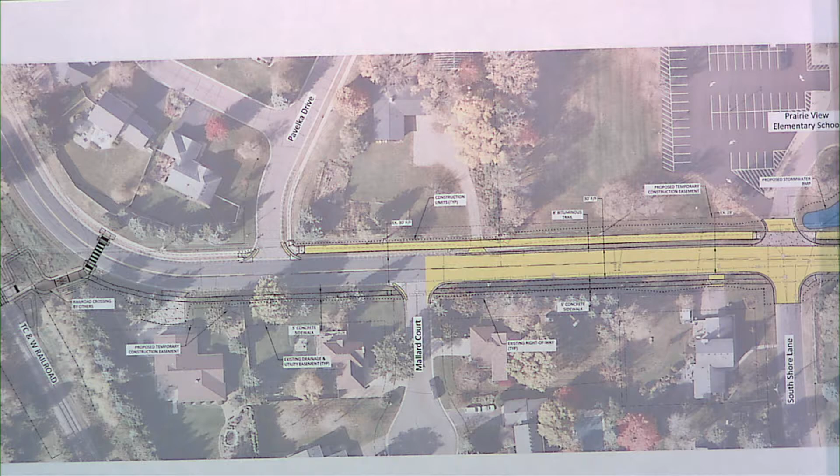But the trail lets us maintain snow removal and so forth with our pickups. Councilmember Case, if I may, when we were doing the analysis for the railroad crossing, we were doing counts of students walking to and from school, and we saw a handful of elementary school students coming from south of Valley View, crossing the railroad tracks going to Prairie View. So there's a small percentage of students who do walk.

I think some of the rationale with the sidewalk on the east side is that they would now be able to cross the track safely and stay on that side of the road, because the current crossing put in around the curve isn't the best. But with a sidewalk on the east side, you could take them up to Prairie View's entrance, where there's a crossing guard who helps kids get to and from school. So I think that was some of the rationale.

The other part of the decision to have facilities on both sides, where we could, is that this is one of those few roads in Eden Prairie that actually has connectivity and goes somewhere—from Crosstown on our northern border, well into Minnetonka, and down to Valley View. So we thought this is one of those roads where we have a chance to do a complete street. It's one of our Green Step Cities programs, to put facilities for walkers, bikers, and drivers. That went into a lot of the decision making about what type of road to build here, because we get one chance and probably won't be back for another 50 years.

I hear that, so thank you, and I agree. So thinking about a sidewalk and not having it in two sections, mainly because of the deep water on the east side of the lake—is this an opportunity, and I realize it's a lot of money, maybe $100,000, to put a wooden boardwalk bridge type concept on the east side, do your major bike trail on the west side and let the ground recharge or whatever, but this might be an opportunity to force in a sidewalk all the way up and down on that east side. So talk to me—if we value the sidewalk, then why don't we really value the sidewalk?

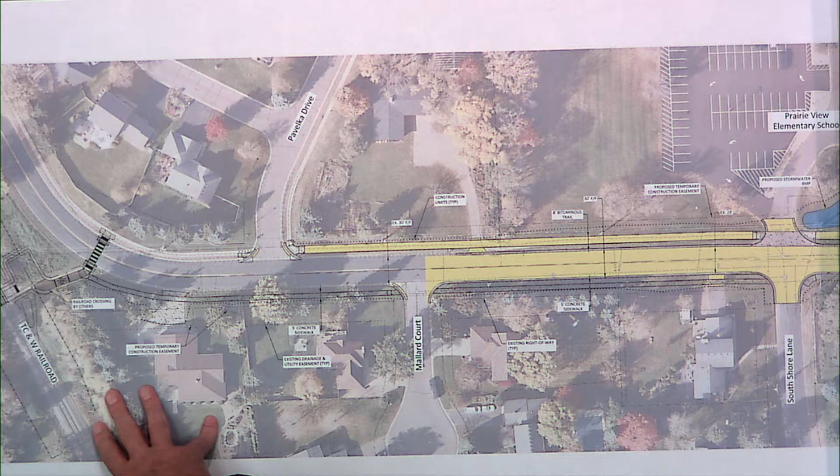May I add? As part of our alternatives analysis, we did cost out that pedestrian boardwalk on the east side, and I can't remember the number exactly, but it was in the $600,000 to $700,000 range. A little bit more than my $100,000? Only six or seven times more. All right, well, thank you for that.

So let's think about where we're at here. This is giving a layout approval to proceed. What kind of detail can be left open, I guess, so that we can take a vote tonight and still have flexibility going forward? Yes, Councilmember Case, to answer that question, I think what we're looking for is an affirmation that you like the road dimensions.

We're not talking about adding a third lane or anything like that, and that you do agree with the facilities being proposed in their location—the trail and sidewalk as proposed is how we would move forward. There is still opportunity to tweak things if we can work with the property owner in the southwest quadrant, moving the trail a little closer to the road so he's got more driveway to park 3 or 4 vehicles, or expanding the driveway a little here or there to make reasonable accommodations.

Those things are on the table and flexible. But tonight we really do need to know: do you agree with that layout, the trails and sidewalks where they're being proposed? If you don't, you need to let us know, because then those things would be eliminated from the project. If the vote is to affirm that, we would move forward with the property owners—this is the final layout we're looking at. Again, tweaks can be made, you can jockey the road a foot or two here, but...